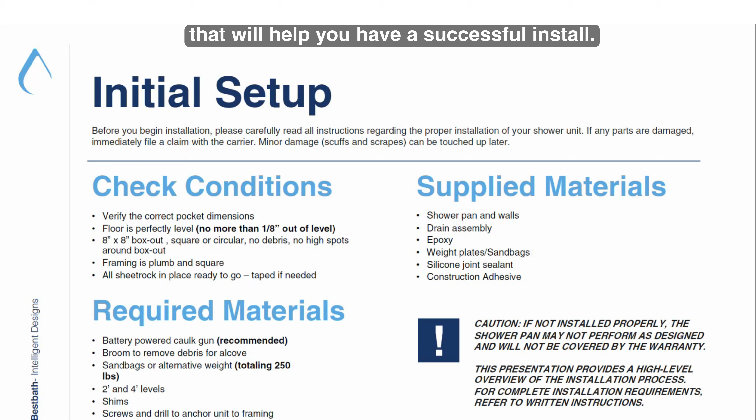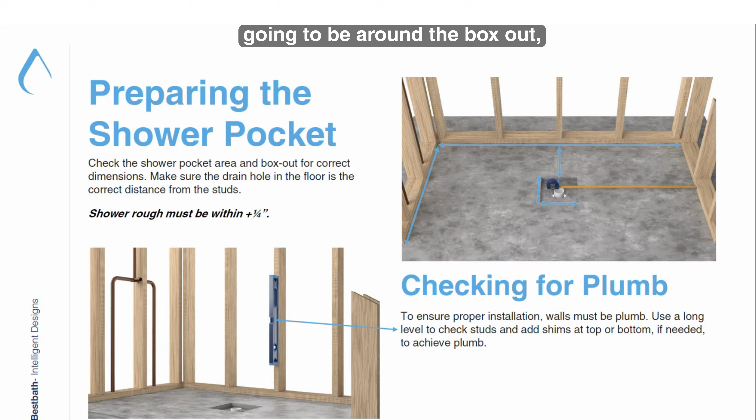First step in installation is just verifying dimensional criteria. We want to check the outside dimensions. We want to check the drain location and the box out. The dimensions for this are supplied with the cut sheet. That way you can make sure that the dimensions you're seeing match the pan. The most important dimensions where we see failure for installation are going to be around the box out, and we'll discuss that here in the next few slides.

Next step is to make sure that our subfloor is level. So in our low threshold blue bottom units, they come out of the factory pre-leveled, and that is our standard for level. So to get a good install, we always recommend that our subfloors are level within an eighth low, nothing proud, because that'll flex the pan out. So we just want to run a level throughout the pocket, verifying that measurement is correct.

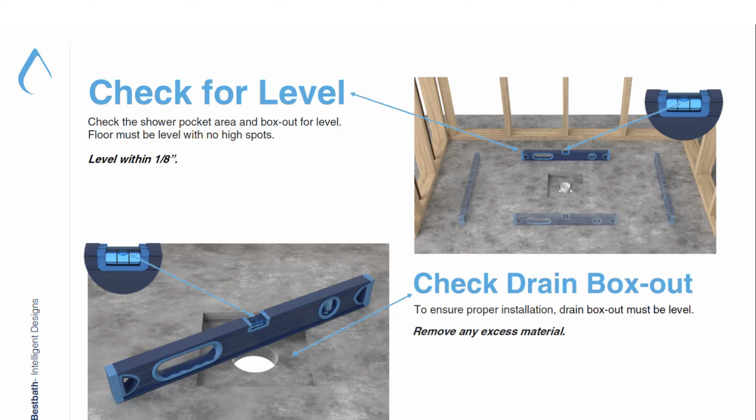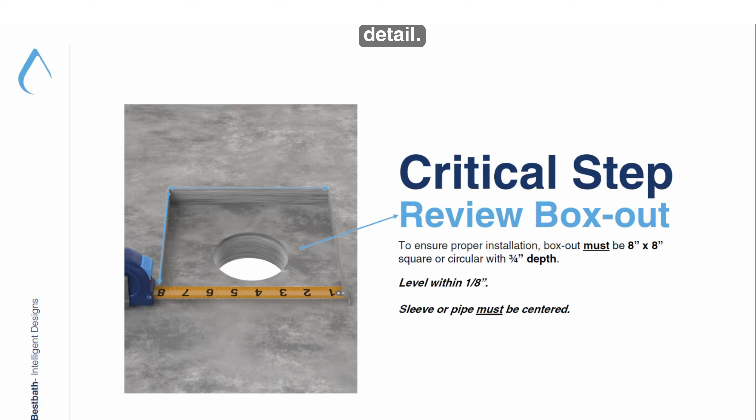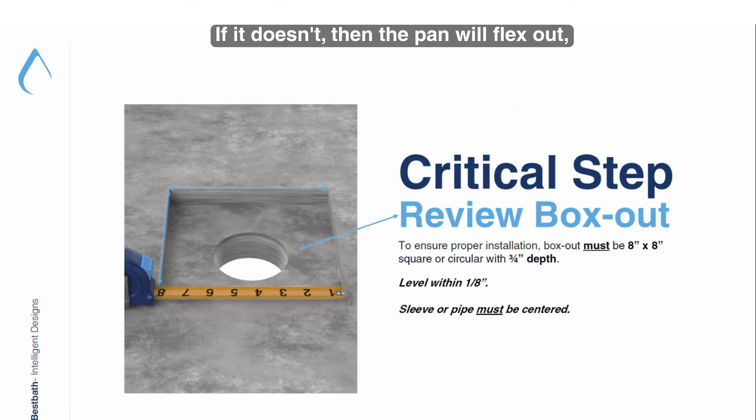As I stated earlier, probably 80–90% of the installation issues that come across my desk have to do with this box out step. It is constantly done incorrectly just due to a lack of care or attention to detail. Our pans, due to the low threshold, will sit below grade, and so we need this recess to ensure that slope keeps going down. If it doesn't, then the pan will flex out and you will not get it to drain properly. The 3/4 is a minimum, so that's just the depth of the box out.

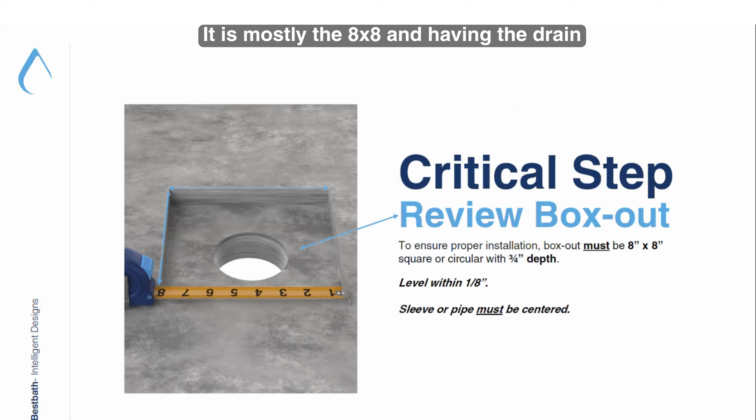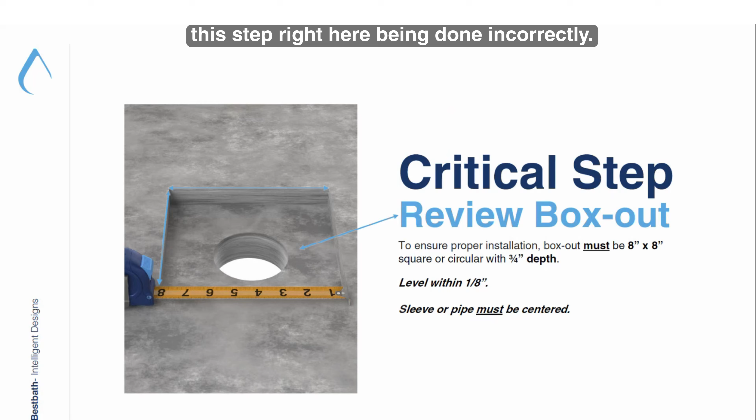That's a minimum. If it's an inch and a half, goes to infinity. That is not the concern. It is mostly the 8x8 and having the drain centered in that. I cannot stress this step in making sure it is done correctly enough. As I said earlier, 80–90% of our installation issues come right through this step right here being done incorrectly.

Next thing we're going to do is remove any debris from the box out here. We're using an adhesive to adhere our showers down to the subfloor. So just to make sure that we get good contact with the subfloor, this is just a cleanliness step. If this is full of dirt or debris, the adhesive is going to bond to that instead of the subfloor as it's intended.

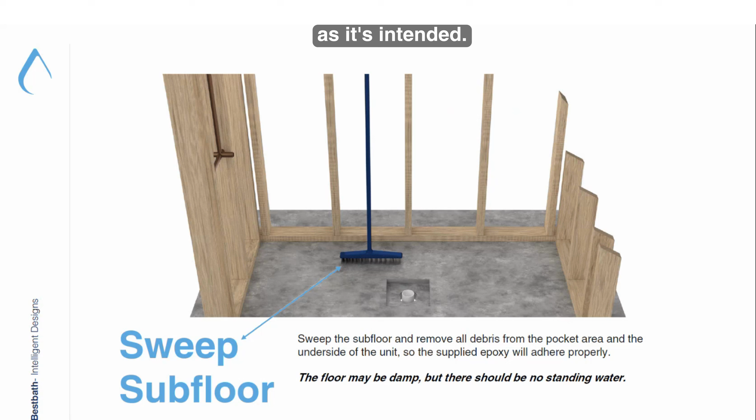Next step is a dry fit. If you listen to me on the box out, I hope you listen to me on this one. This is a great area to check to see if there are going to be any issues before you glue your pan down. We want to make sure that everything is designed as intended and is going to work properly.

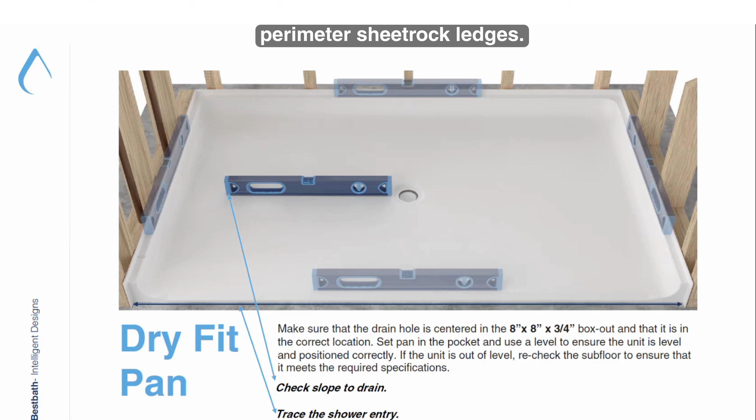We want to place a level on the perimeter sheetrock ledges. Those are all molded level. So you want to make sure that the reading on the left, the right, and the very back are all level, as well as the front threshold. That is another molded feature that is level. Wall systems will all be indexed off these walls. So we want to make sure that that is level.

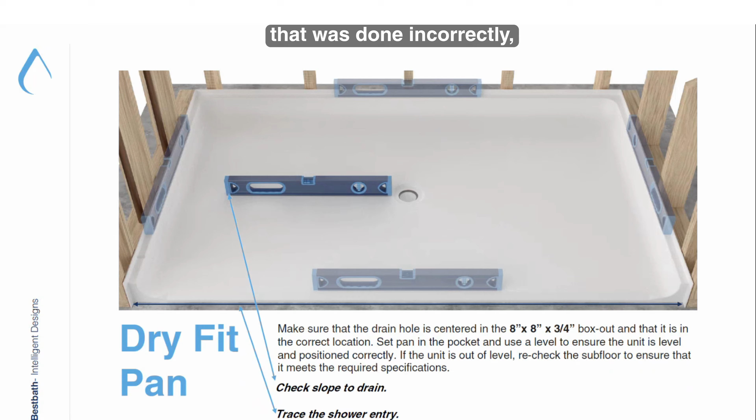And then we also want to ensure that we have proper slope to the drain. So if you're in the center of the pan, you just kind of want to move that clockwise, ensuring that there's no rocks and that we're getting slope to the drain. So if you missed the box out step, if that wasn't done, any of those issues that would occur because that was done incorrectly, you could find out here in this dry fit step.

Next component is drain assembly. This is done by a licensed plumber. We just have an assembly view here of our standard brass drain with all the components to that. We want to install that before we get to gluing the pan down.

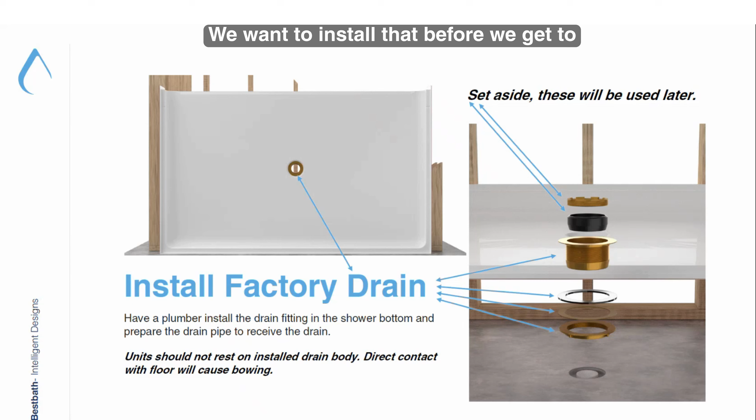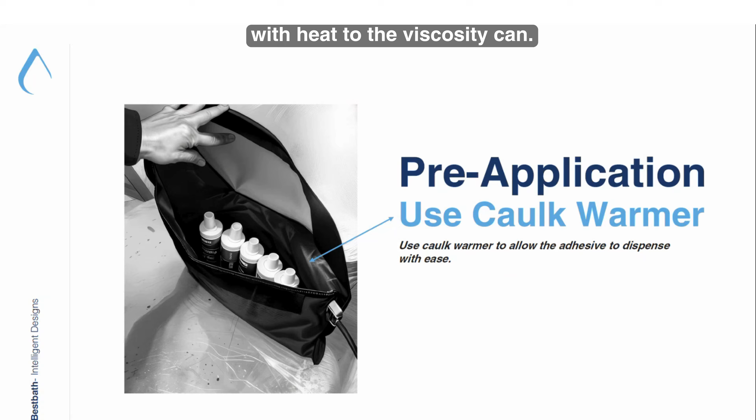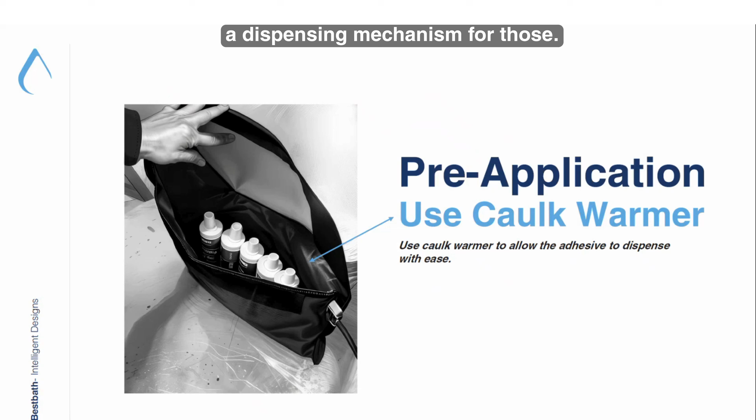A tip here, our adhesive's viscosity can change with heat. So these warming bags can be used to help dispense the adhesive. Another nice tool to have is a battery gun that has a dispensing mechanism for those. The one thing that I would state is those, regardless of brand, they hold a wide variety of cartridges.

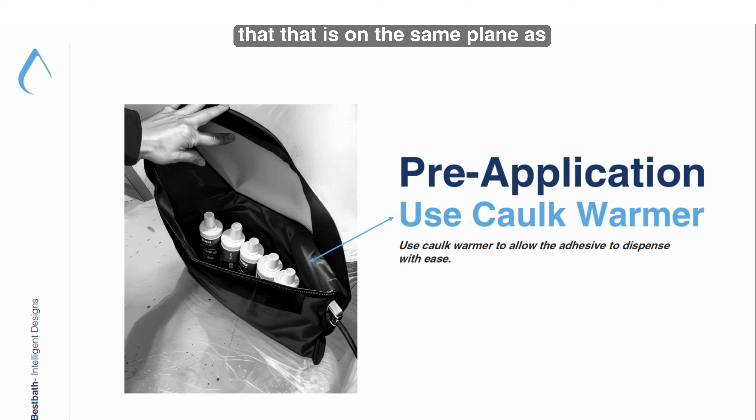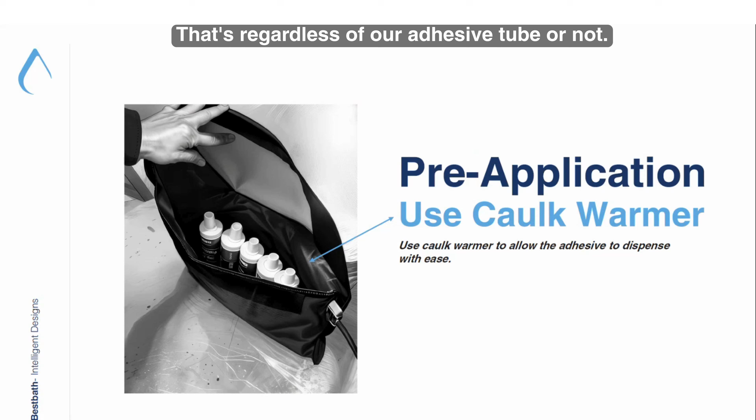You just want to make sure that as that piston's driving down, that is on the same plane as the coaxial tube. If that's not, then you'll see the tube start to bend and pinch. And if the operator's not careful, they can bust the tube. That's regardless of our adhesive tube or not, just the way they design those guns is to handle a variety of different sizes.

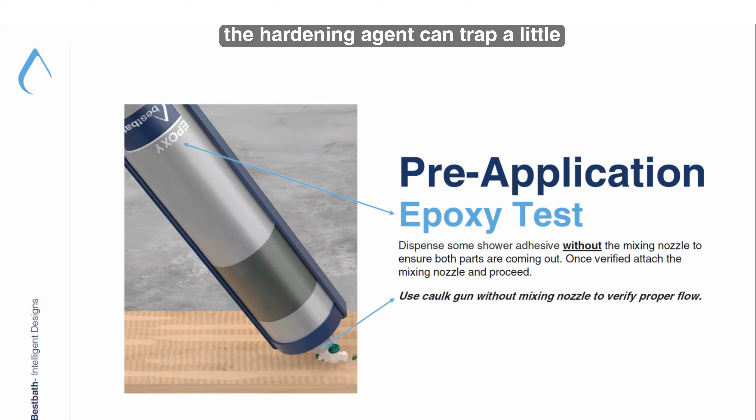One step that we try to instill for best practices is a purge of the adhesive. So before we put a static mixing tube on the adhesive, there's two separate parts of that adhesive, but we want to make sure that they're dispensing correctly. In the manufacturing process, the hardening agent can trap a little bit of air and make that initial purge take a little bit longer. Just to make sure that you get the correct mix, we suggest before putting that mixing tube on to just inject a little bit out until you see both the resin and hardening agent come out evenly.

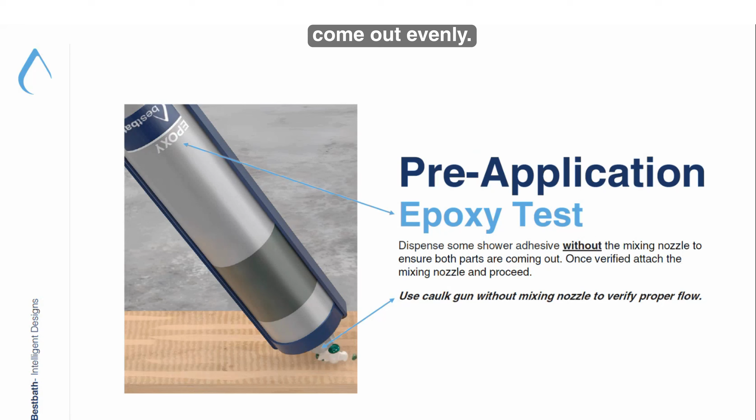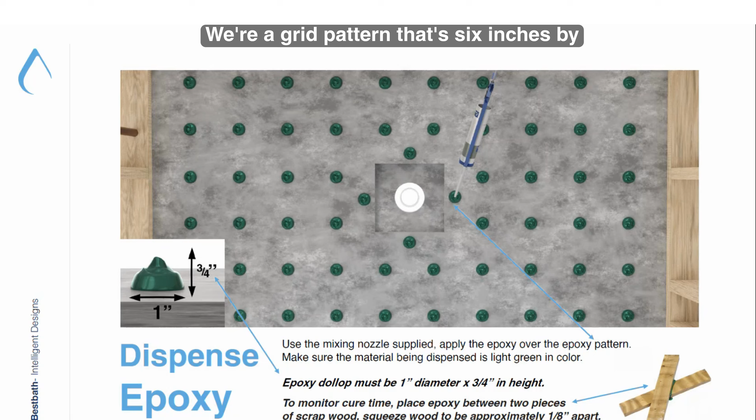From there, we're going to place our adhesive in the shower pocket. Right here, we're seeing a grid pattern that's 6 inches by 6 inches of epoxy dollops, 4 inches off the left side and 2 inches above the front threshold. An important step is to make sure that we get the adhesive height correct. That is 3/4 of an inch. I recommend grabbing a piece of 3/4 inch material, whether that's wood or something similar, just so you have a height for index. Once you do a couple of those with the index, then your eye will kind of catch that height and you can keep moving forward.

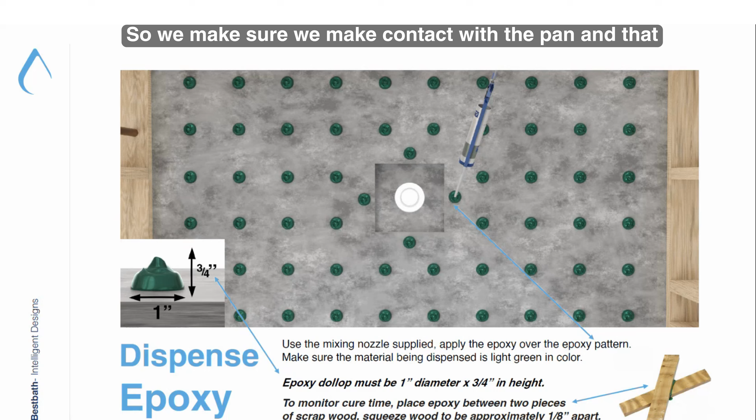It's important to get that height so we make sure we make contact with the pan and that we're not cutting that adhesive short, especially in those spots that you could have had underneath there. That height allows us to get the correct support and sufficient contact with both the subfloor and the shower base.

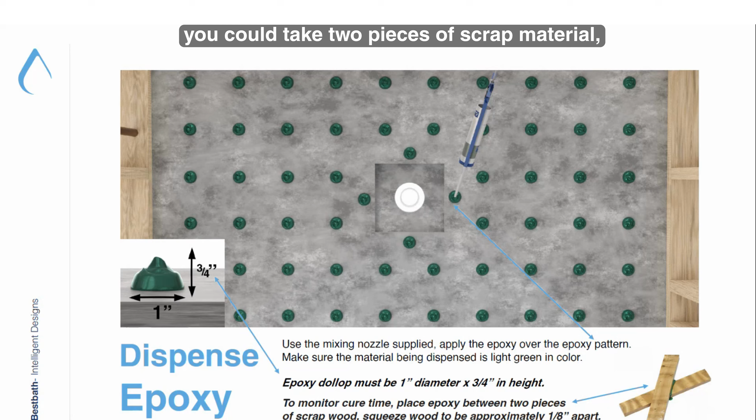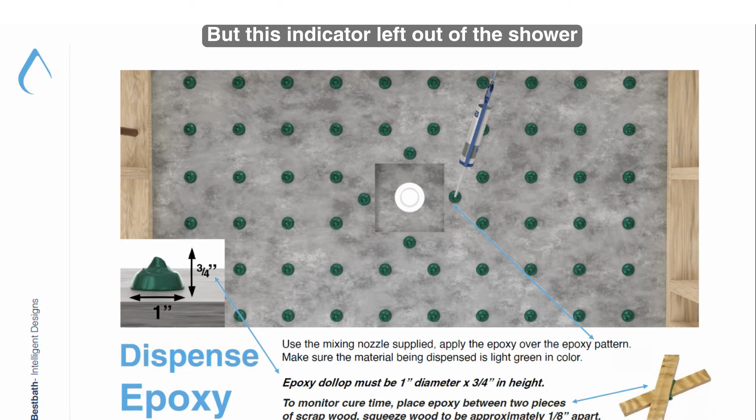This adhesive is a chemical cure, so it's not driven by moisture or anything like that. So for an added indicator for cure, you could take 2 pieces of scrap material, put a little adhesive on it, and set that aside. Once you put the shower base down, it's going to be hard to indicate the degree of cure, but this indicator left out of the shower pocket will give you that indicator.

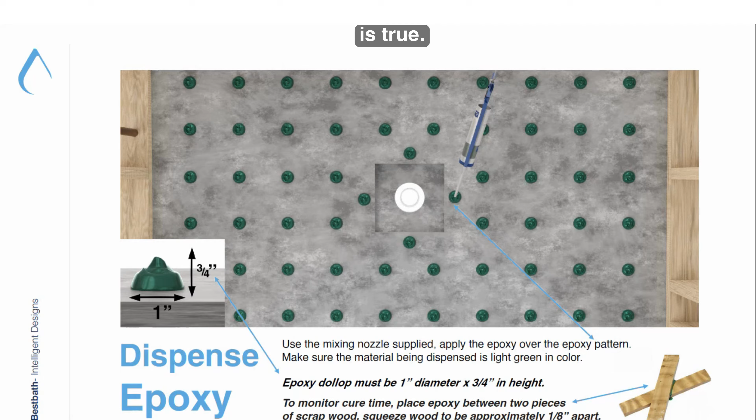We also put on our adhesive tubes the working time with temperature. As temperature increases, your working time's less, and the opposite of that is true. Those are on our adhesive labels in both English and Spanish to give you a rough indicator of your environment and how the adhesive will behave in that.

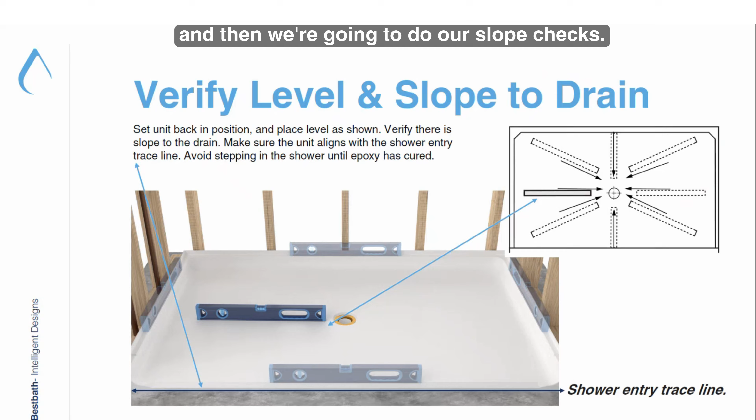That is not ideal, but it is a lot more affordable than when that adhesive is cured. When that adhesive's cured, you're gonna have to rip the shower base out. That's gonna be your wall system, floors. It is a very expensive process. So this is just one more check to alleviate any of those concerns. We're just gonna check the sheetrock ledges, the front threshold for level, and then we're gonna do our slope checks. Just do that one more time before that adhesive is fully cured.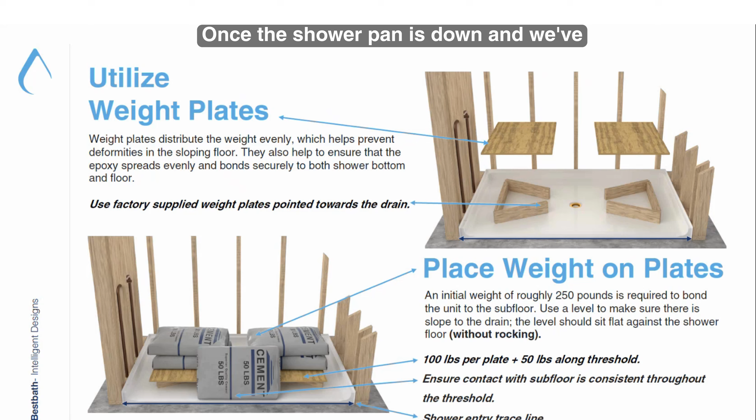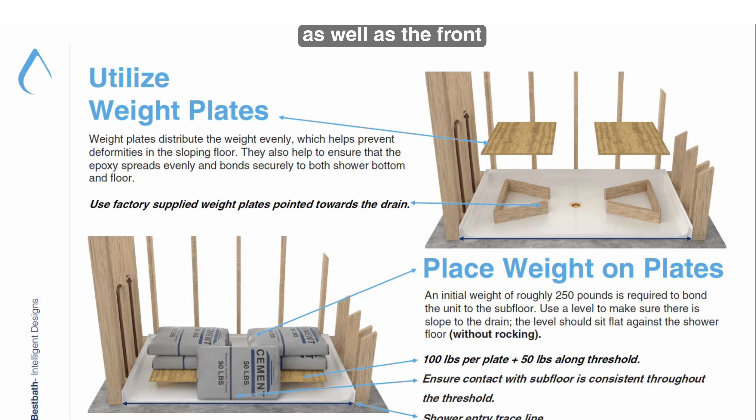Once the shower pan is down and we've checked all of our dimensions, we're going to weight the unit down. This is just to help make sure we get good contact with that adhesive, both on the subfloor and shower base. The instructions on how to build these weight plates are in the installation instructions. We're just going to place some weight. We have some bags of cement shown here, but you could use buckets of water, anything that's dead weight. We're going to put that weight on the weight plates as well as the front threshold. Those weight plates are designed to kind of follow our slope lines. That way we're not going to deform the pan in an unneeded way.

Once the adhesive has cured, if you're coming back the next day or you checked your indicator, you can remove that weight, and then we're going to pre-drill to get ready for our fasteners. Always recommend pre-drilling, just best practice, and to stay away from impact guns. Some people can get a little aggressive with the impact guns, and you can suck the screw head through the shower base if you're not careful.

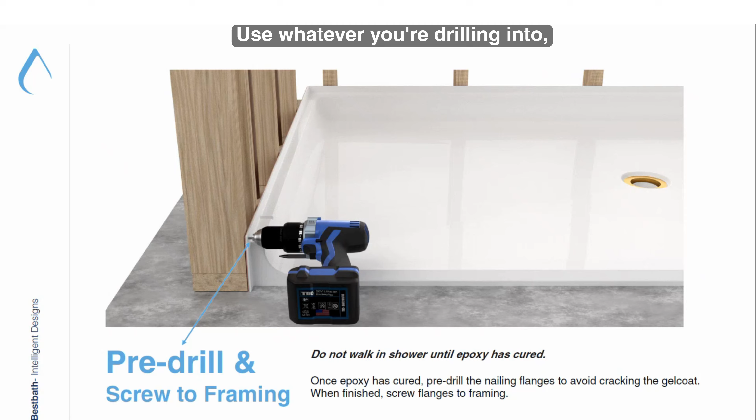So just pre-drill on all the studs, and then you're going to place an anchor or a fastener through there. We have it shown as wood, so you could use a regular drywall screw there. But if you have CMU or masonry, just use masonry hardware. Use whatever you're drilling into, whatever that structural member is. Use the fastener correct for that.

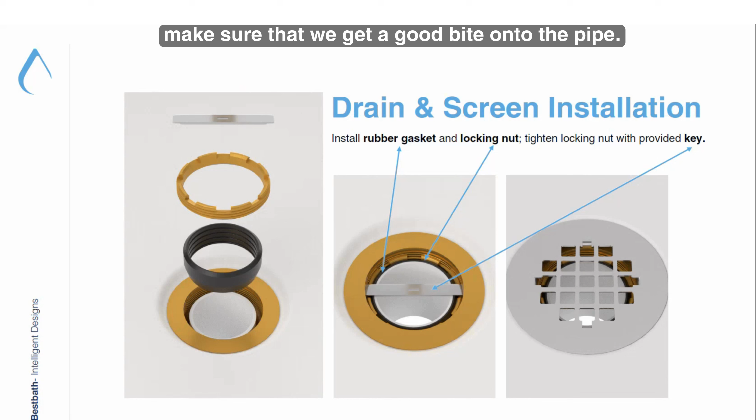From there, we're just going to finish up the drain assembly here. We're going to put on the compression gasket as well as that top locking nut. We'll be able to fasten that in, make sure that we get a good bite onto the pipe, and then we'll put the drain screen on top of that.

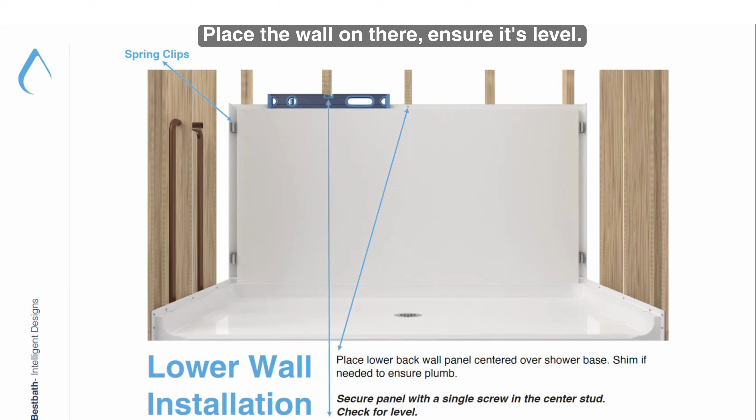Once the base is installed properly, we can begin our wall installation, and we'll be going through the spring clip design in this demo. First component is just starting off with the back wall. As I said earlier in the presentation, the pan is level. When we place our back wall on there, we want to make sure that that's transferring up top. So I'll just rest that back wall on there on that sheetrock ledge, place the wall on there, ensure it's level. Once it's ensured, then we're just going to anchor that to the studs. Once again, pre-drilling and using the correct fastener for the structural member.

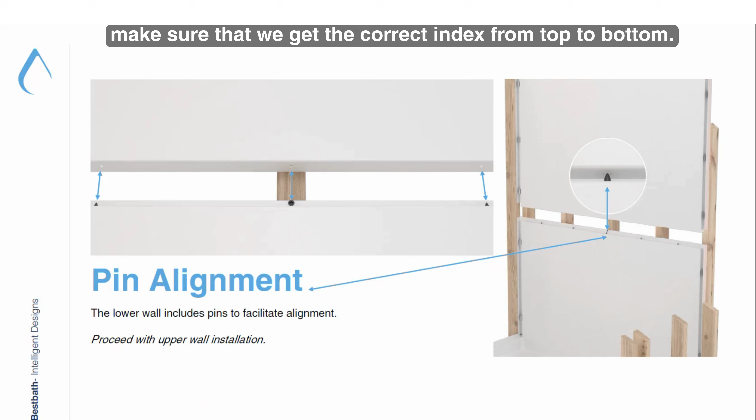Once the lower back wall's installed, we're going to move on to the upper back wall. We have some index pins to help align the two walls. The bottom half is going to have some pins and the top half is going to have some mating holes. So we're just going to slide those down, make sure that we get the correct index from top to bottom. From there, we're just going to check level to make sure that what we've got from the base lower back wall is also transferring to the upper back wall. Once we feel confident in that, we will then attach the upper back wall to the studs. Once again, pre-drilling and using the correct fasteners.

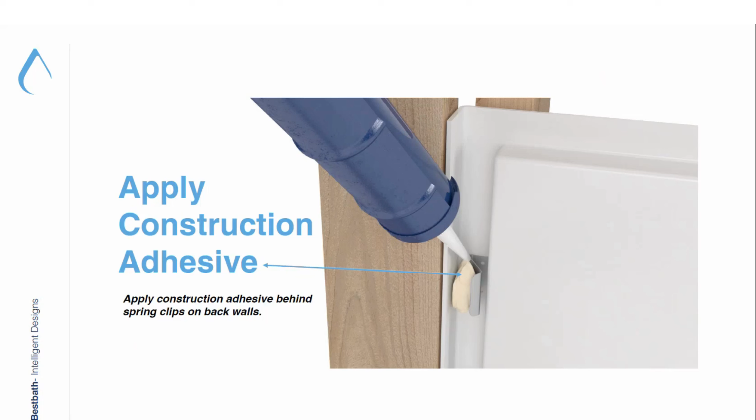After the back walls are installed, we're going to move on to the side walls. We have a spring clip design here. We're going to place a construction adhesive against the spring clip. This is supplied with the order, and how that will behave is once we engage the sidewalls, that adhesive will cure, and then it will prevent the spring clip from moving anymore. It'll lock it in place.

Next step is going to be checking for our valve holes. We want to make sure that we dimensionally get those correct. Once you drill into the walls, it is a little laborious to patch and fix these. So this is definitely a step you want to measure twice and cut once.

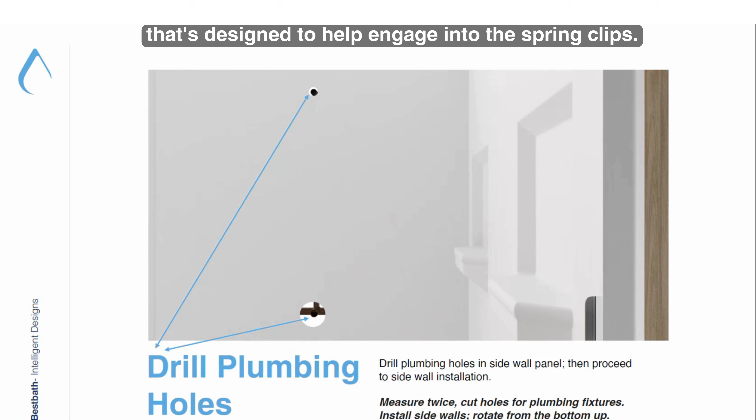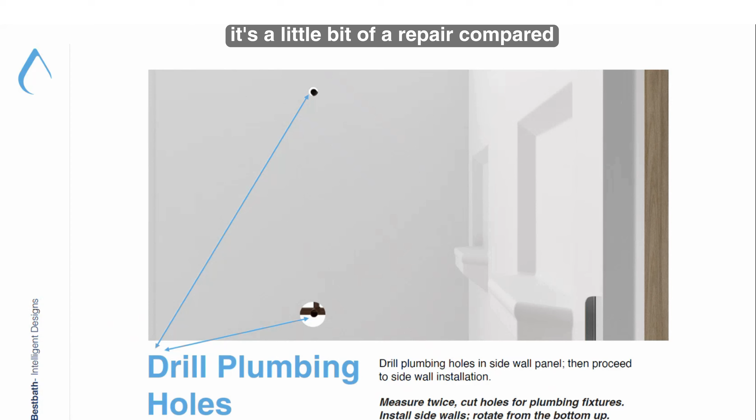We have molded features on the top and left side of the wall shown here. So we want to go off those. If you were to go to the right, you'll see some geometry into the pan that's designed to help engage into those spring clips. That is not where we want to measure from. We want to measure from the outside and going into the valve. That'll be your true dimension, and that'll be the one that's molded, and then top down as well. So be cautious when you're doing these measurements. Take your time, because once you cut through this, it's a little bit of a repair compared to just a simple chip or scratch.

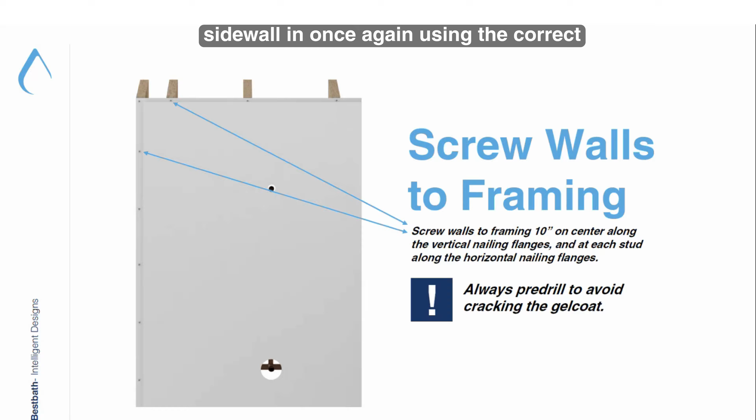Once those holes are in place, we're just going to slide that wall into those spring clips that were shown. Those will lock in once that construction adhesive is cured, and then we're going to go through and pre-drill and screw the sidewall in, once again using the correct fasteners. Once all the walls are in place, we're just going to silicone the seams. This is supplied with the order.

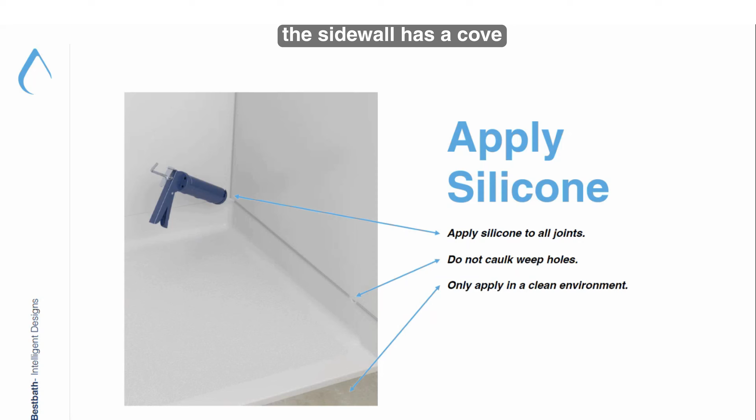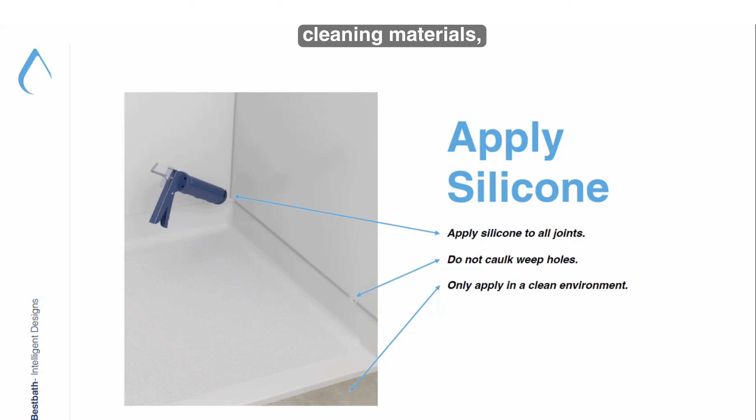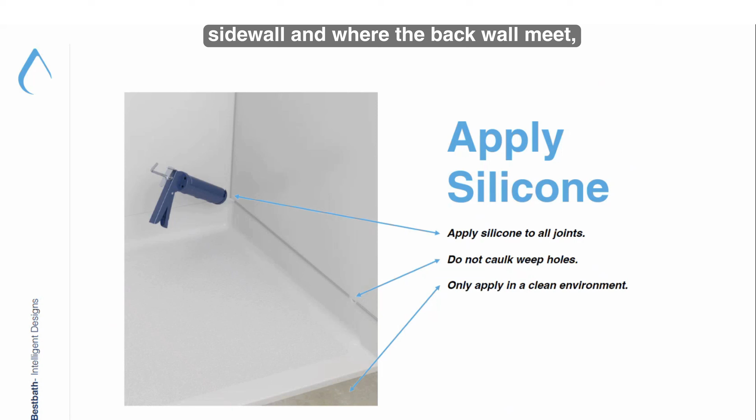One thing we want to be cautious of is all of our bases have a weep hole. So in the slide, the sidewall has a cove designed into it. So if the silicone fails for several issues, whether it was poorly applied, the building settled over time, cleaning materials, whatever could have caused the silicone to degrade, we've tried to incorporate an indicator that allows you to notice that you're getting water behind your unit. So if the silicone were to fail where the sidewall and the back wall meet, water would get down there and drop to the pan and it'd make its way to the weep hole.

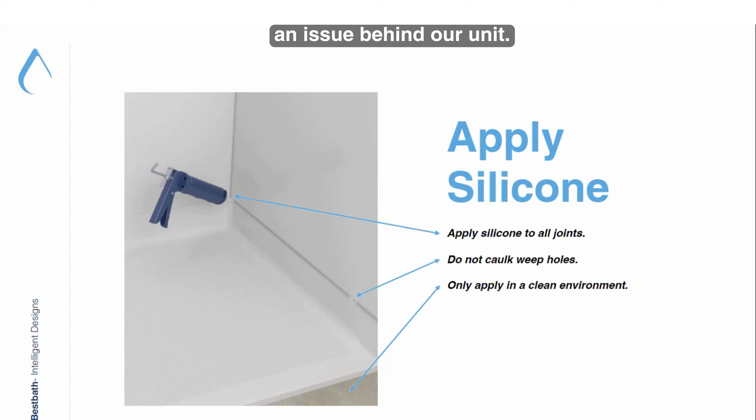We do not want to cover that with silicone, to leave that indicator available to us. It's a lot less expensive to know that you have an issue behind your wall now compared to rotting drywall or your floors rotting. This will give you a leading indicator that we have an issue behind our unit, and it's better to know that sooner than later. With that, that completes our demo on low profile installation as well as spring clip wall systems.